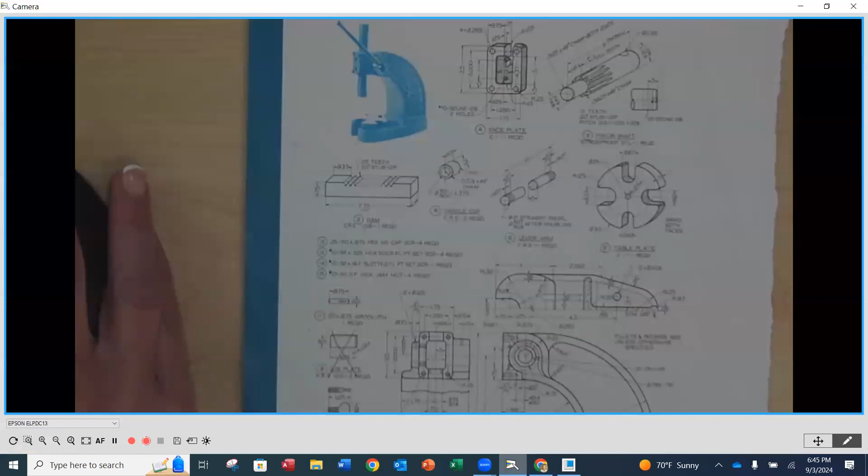Okay, so I wanted to give you an overview of the arbor press assembly that we're going to be doing for our second project. We're going to be spending about 2 weeks on this project, and you'll find the details in this PDF where it says Module 2 arbor press details.

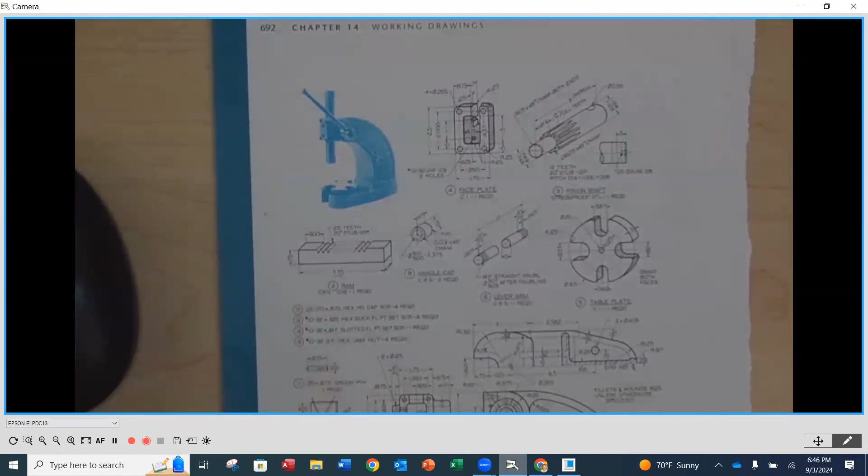I have a couple of working arbor presses here in the lab. They're not the exact duplicate of what we have on our assembly, but as far as working parts overall, they're pretty darn solid and pretty close.

You'll notice there are a series of parts here that we will be putting together to create this full assembly. If you have a physical copy, we are not going to be incorporating item number 9, which is the gib plate. You can cross that one off. The gib plate will not be used.

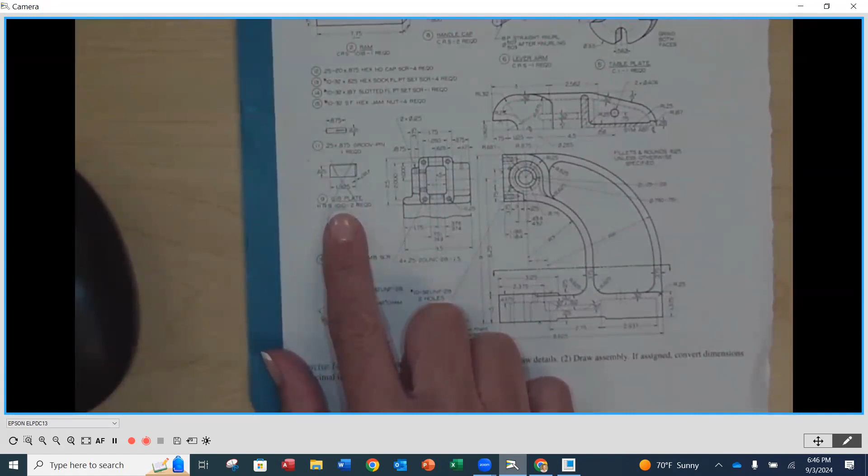We won't be creating that, we don't need it. Items 12 through 15 are just basic hardware - these are descriptions of each individual piece, which we will be using Creo to input, so we won't be creating details for those. But other than that, we will be creating the part models, details, assembly model and drawings for each and every one of these parts.

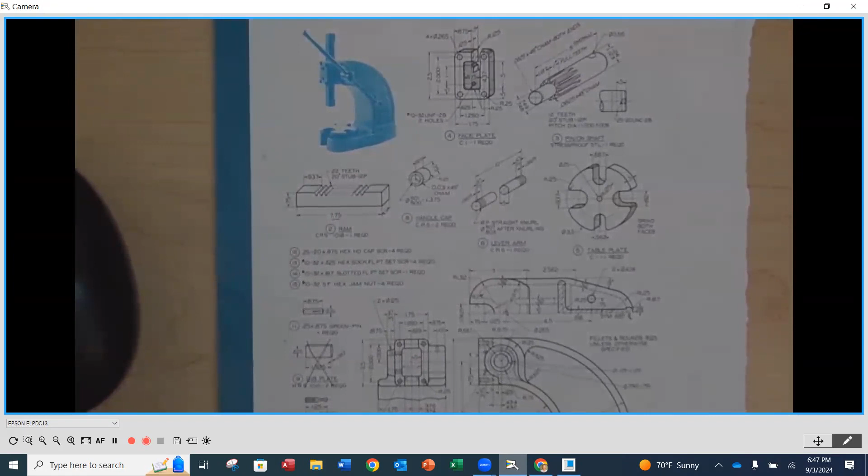As we're looking at these, there are 3 parts I'm specifically going to go over with you guys in terms of introducing, because there are some elements on these that are of a more advanced nature. The ones we're going to look at are the pinion shaft, the ram, which is the rack for that pinion, and then we're also going to do the frame together - or I'll do a demonstration of it.

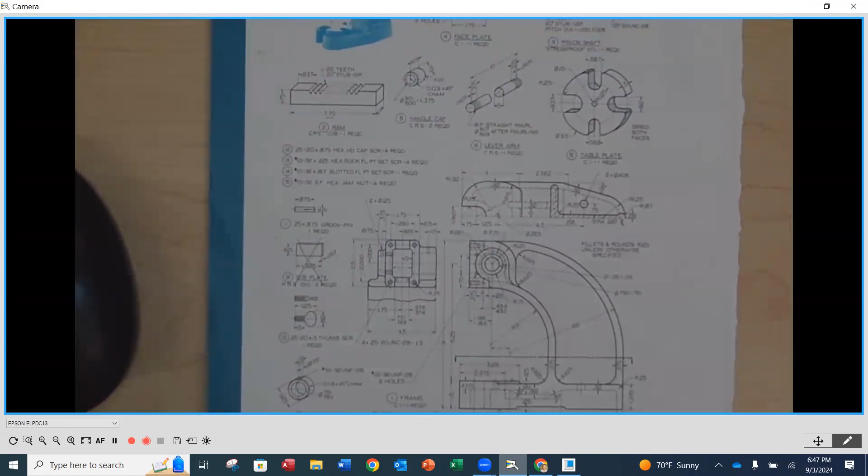You're certainly welcome to go off on your own and create the models for all the other parts - those should be pretty straightforward for you. But if you wanted to attempt any of these, you're totally fine. Just know I'm going to be doing demonstrations for those 3 parts specifically, so you get a good idea of how to create those.

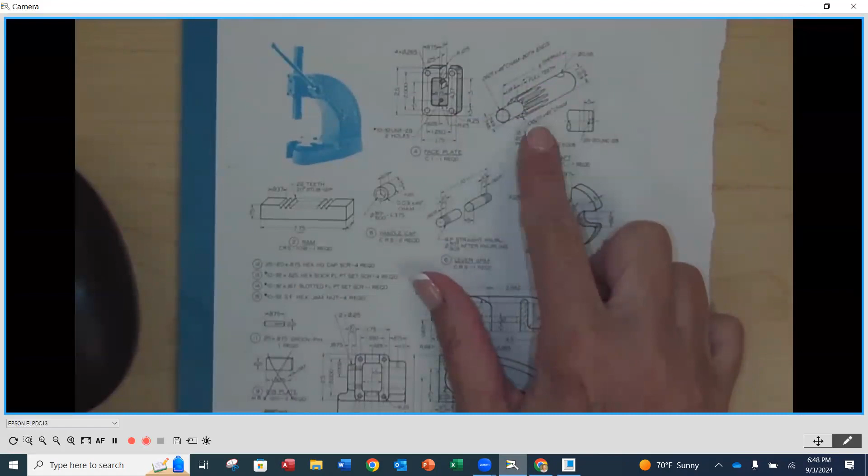When we look at the pinion shaft here, these have gear teeth on them, and Creo does not have a function in the base package as part of our licensing to create those gear teeth. So we're actually going to be creating a sketch and using the sweep function to cut those teeth into that shaft. We'll go through a process to do that, and I'll be demonstrating it for you.

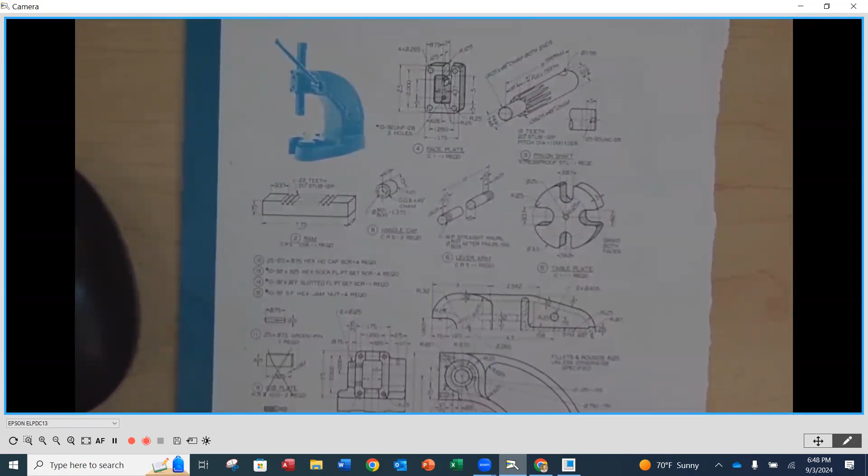The other one we have here is the ram. We are also going to have to manually create those teeth. Once we get one created, we can use the pattern function to do the others, but we'll construct that as well. So these 2 we're going to do.

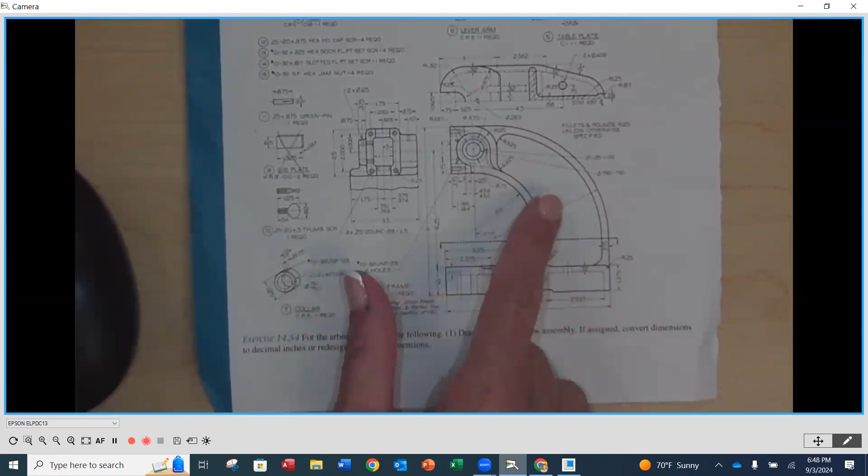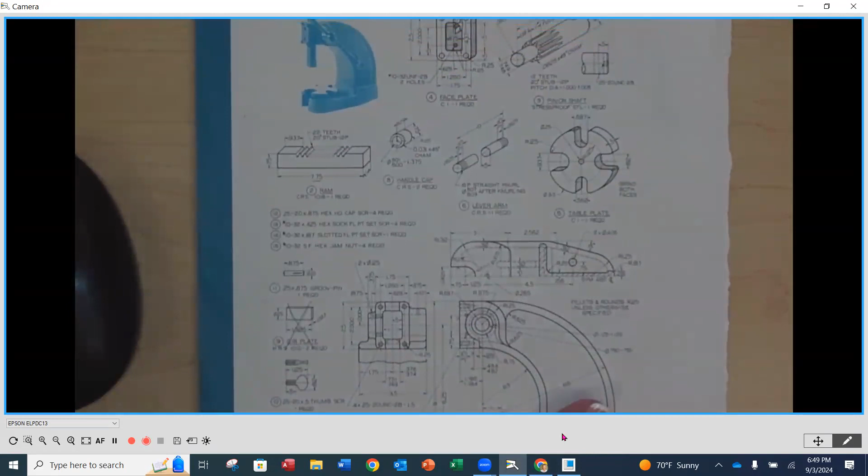And then as we look down here, we're going to be using the swept blend function to create this arch on our frame portion of the ArborPress. So I'll walk you through what's involved in that process as well. That's what we have as far as the project itself - a full set of working drawings making sure things fit together, checking out tolerancing and applying good dimensioning skills.